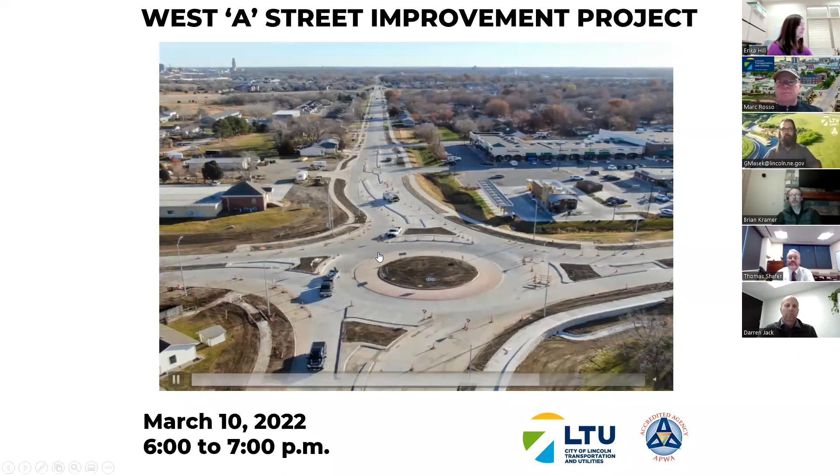Okay, so on the agenda this evening, we will review progress that's been made since we last spoke with you all. We will be going through upcoming work and what you can expect through the spring and summer months. We'll break down Project A's next steps and go over the next steps for Project B. We'll continue to offer additional communication and identify a few ways to stay in touch in between these project updates if you have additional questions. And again, we'll open up the chat for everyone at the end of the presentation.

So I'd like to introduce Senior Construction Engineer Marc Rosso. Marc has more than 30 years of experience with the city and in the engineering field, 5 with the city. He is really a wealth of knowledge when it comes to construction planning and project delivery. He is joining us to talk about the West A Improvement Project and progress made on Project A specifically.

All right, thank you, Erika. So we're getting going, probably next week we're doing tree removal right now, and then we're going to work on the rest of the project from west of the Coddington intersection there. For those of you joining us the first time, here's a map that shows the entire project from Southwest 5th to Southwest 36th. It's one of the larger projects that we do in Lincoln.

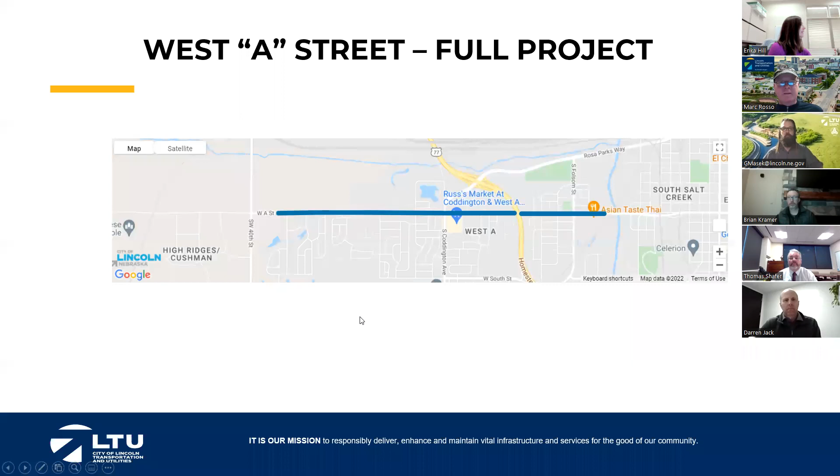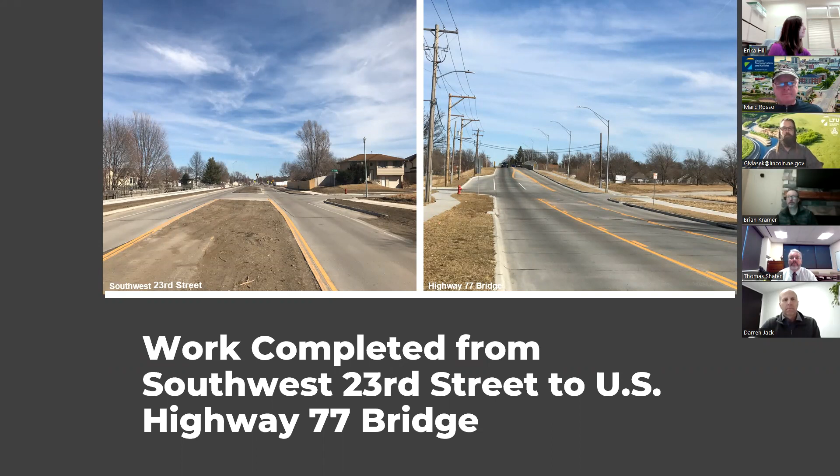So this is, next slide please Erika. Is it going? We're getting there. All right, there it is. So this is the project I'm talking about. Most of us have seen the whole thing, so I'm not going to go into great detail about it. Next slide. This is work completed from Southwest 23rd to US Highway 77, which of course was completed last year. Next slide, there we go.

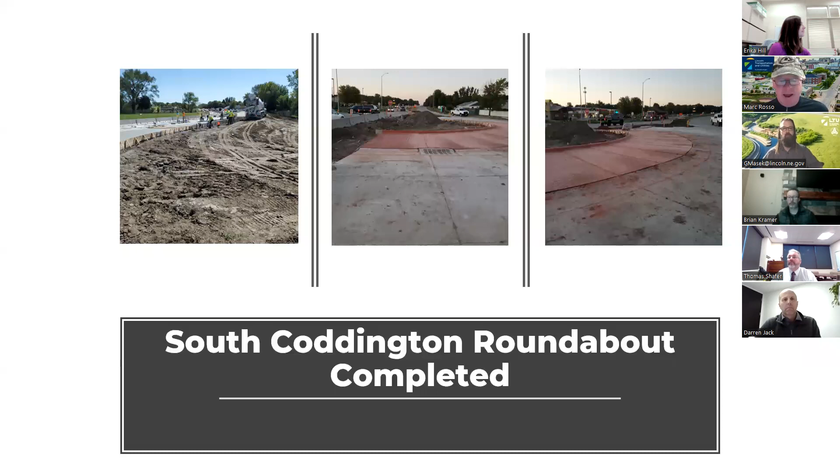This is the South Coddington Roundabout. We'll have a nice video of this later. It seems to be working pretty well, and I think people have adapted to it quite a bit. So we'll talk about step by step to complete Project A. Next slide. Roll the video. It worked, yay!

It's been open since November 29th of last year. Roundabouts, I think as many know, are used to improve safety, increase intersection capacity, and they're very efficient. They also reduce environmental impacts and enhance community values, and are quite a bit lower cost over a traditional intersection because we don't have to change signals out. Next slide.

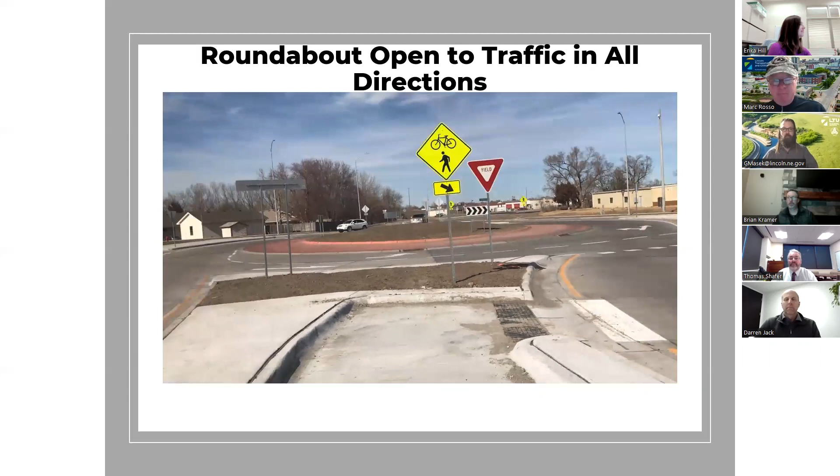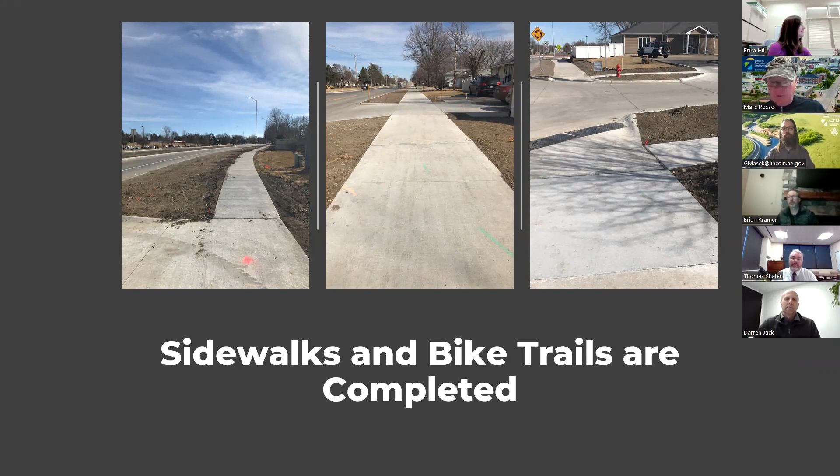Most of us have seen the new driveway connections, those turned out pretty well. Next slide. Sidewalks are all complete, I think the trail users in particular really like the wider trail. So that's completed all the way to the Highway 77 bridge. And when it's completed to Southwest 36th, it will be 9,100 feet of new trail. Next.

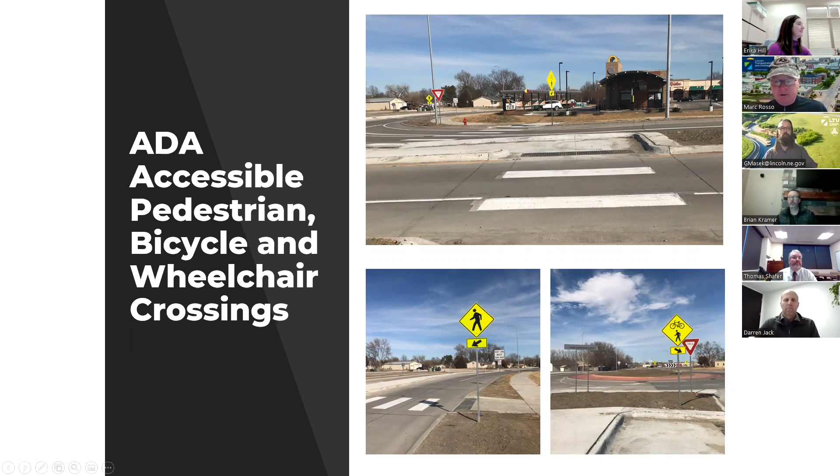We've got ADA accessible pathways and wheelchair crossings. This is especially good because it offers the ability to cross one direction of traffic at the roundabout, increasing safety.

Pavement markings are a challenge in Lincoln because our contractor seems to go away and not want to come back to do them, but they're all in place now.

Water, wastewater, and stormwater work is complete. If you recall, there was a deep cut, about 25 feet deep, for the sanitary sewer.

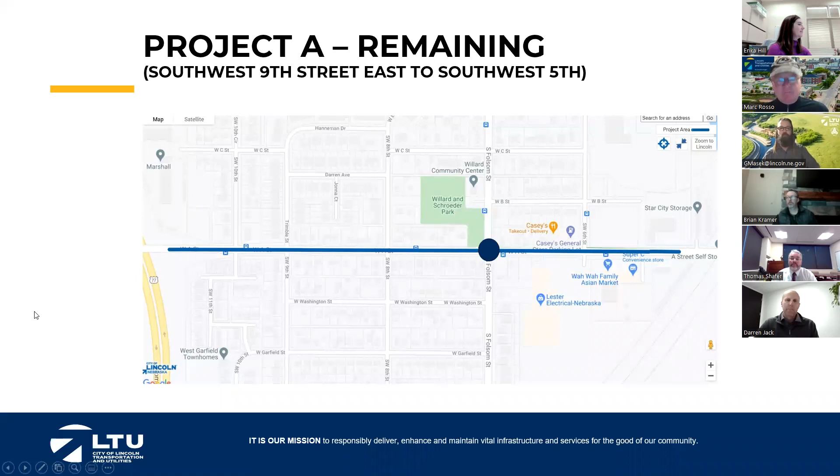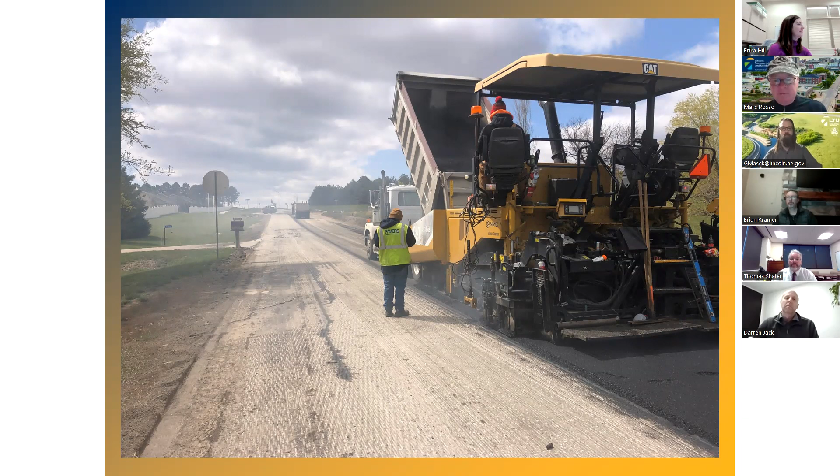I think most of us have seen this over the course of our lives. This is milling and overlaying, which basically scrapes off the surface and puts down a new asphalt surface, which usually results in extending the paving life.

We've got to finish seeding. Seeding improves erosion control, and once it's established, provides what we think is a nice looking product.

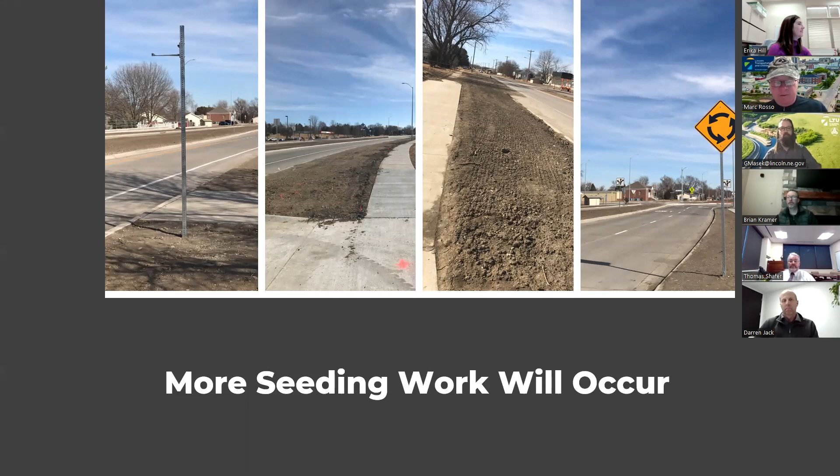We've been pretty busy over the past couple months. The design engineers have been working with homeowners to finalize our right-of-way agreements. We've been hiring contractors and coordinating relocations with utilities.

Back when we started street construction for Project A, you might remember we had LES relocating their power lines, crews installing wastewater pipe, and a few utilities that weren't even ready to get started. That was all going on while we were trying to reconstruct the street.

So for Project B, our plan is to complete much of that utility work before we even get started on the street construction. If you've driven along West A in the past week or so, you've seen that it's already getting started.

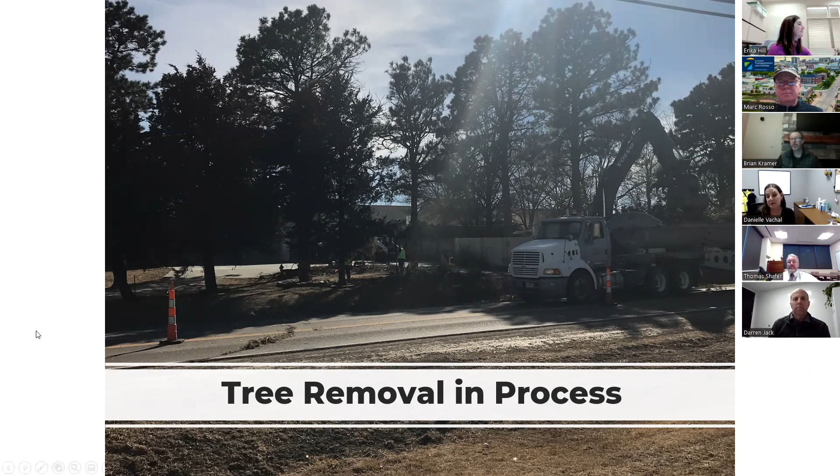You may have seen that some of these large trees have been cut down, but the tree trunks are still there, and you might wonder what's going on.

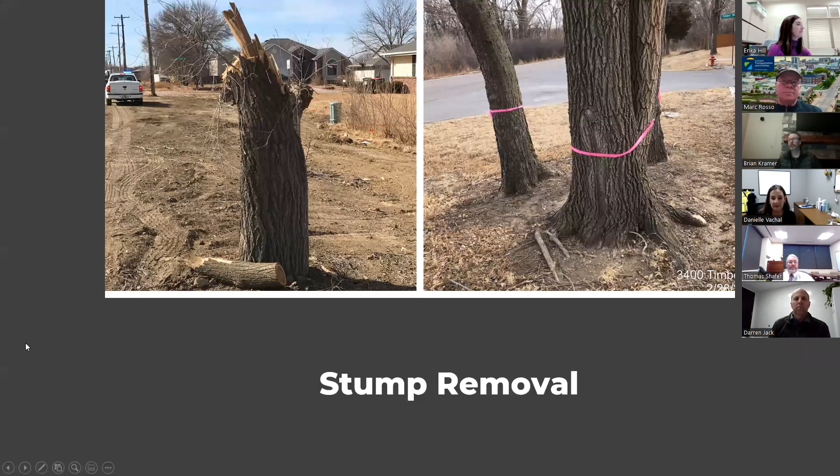What we have left are the stumps and large tree trunks. The contractor will come back after the April 1st deadline to make sure we get those tree trunks and stumps removed.

With that tree removal in progress, lane closures have been going on and will continue to be necessary for tree removal and other upcoming utility work.

For now, we are allowing the contractor short-term daytime lane closures. However, as work continues, you might see total closures over a few blocks at a time. These closures will be communicated through message boards and the neighborhood Facebook page. As always, please slow down through construction areas and keep an eye out for our crews.

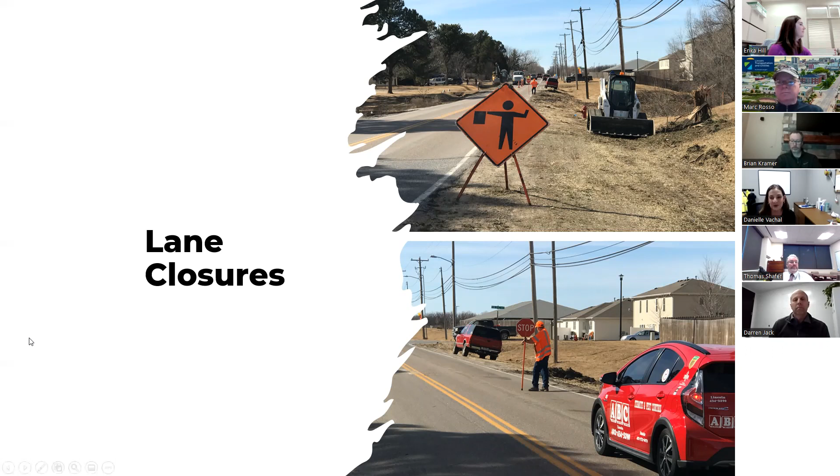Once we get the trees removed, LES will begin relocating their power lines from their power poles up in the air to underground. Starting next week, LES will begin staking their work areas and mobilizing equipment. Most of LES's work is on the north side of West A, off of the existing roadway. Those lower lines belong to Windstream and Spectrum, and since those cables are on LES poles, they will also be burying their cables so that the poles can be removed. LES is anticipating that their work will take 6 to 9 months.

So that was all on the north side. On the south side of West A, we have 2 utility projects. First, Black Hills Energy will be relocating a gas main between Southwest 23rd and Southwest 36th. This work will also occur outside of the existing street and is anticipated to take 6 to 8 weeks. The second utility project on the south side is a new wastewater line. Both projects are on the south side of the street and both plan to work from east to west. However, we're giving Black Hills Energy a 2 to 3 week head start so that they can be out of the way for the wastewater project. I'll tell you more about the wastewater project here in just a bit.

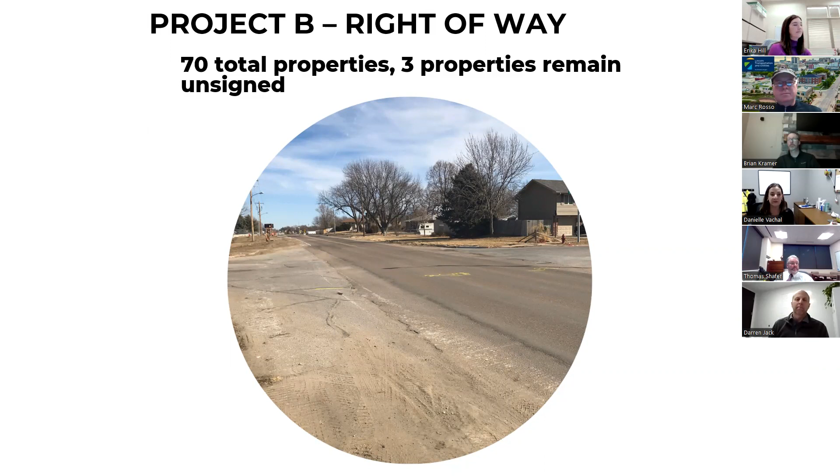The one more thing you'll be seeing happening out on West A is the removal of the house on the north side of the Southwest 36th Street intersection. Once this land is cleared and the street is constructed, the north leg of the roundabout could be used to connect to potential housing development in the area. Removal of this house will occur in April and should take less than a month to complete.

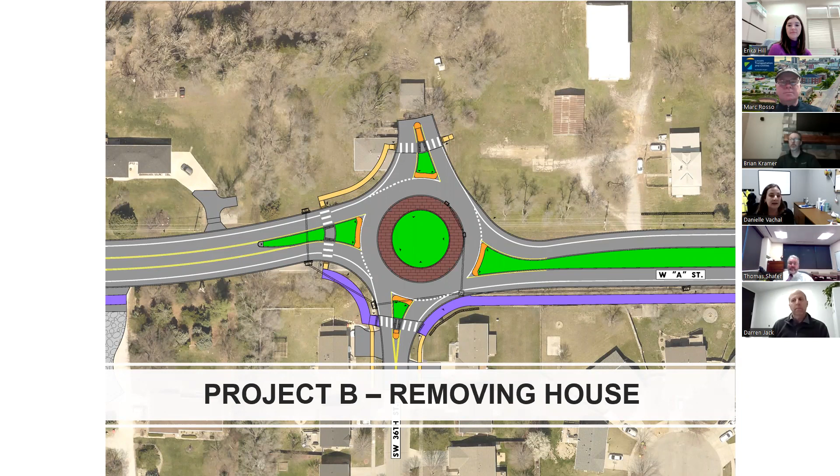Now for more information on the wastewater project I mentioned earlier, I'd like to introduce Brian Kramer. Brian is the superintendent of wastewater collection with the City of Lincoln, and has over 20 years of experience and dedication to the Lincoln community. Brian is here to talk about their plans to install the wastewater lines along Project B.

Hello, everybody. I've been a silent partner so far in these projects on West A because we've gone in with the paving projects, but on this project, we're going to be separated out and do the majority of our work this year, with the paving, I believe, taking place in '23.

Just to give you some context about wastewater before I start, there are 1,100 miles of sanitary sewer lines in Lincoln, and we have about 20,000 manholes across the city, and our pipes range from 8-inch to 96-inch in diameter. So it's quite an expansive system.

On this project, we are installing sewer, replacing some sewer and installing some new sewer, right where the paving is going to happen, starting from Southwest 23rd. Then we'll work our way west towards Southwest 36th. We're installing about 6,500 feet of sanitary sewer pipe.

Previous to this phase 3, we did our phase 1 and 2, and that was done with the paving that occurred east of here. Primarily what we're installing is 18-inch, and there's some 21-inch sewer, 10-inch, and 15-inch. It's a lot of various sizes on this project.

Starting on the east side at 23rd, we're replacing the sewer that's there today. It is undersized, and when it was built, it was vitrified clay pipe, and that clay pipe is starting to break apart and is becoming unreliable. So we're installing that with a new product. Could be PVC, might be HDPE. We'll have to see what's available and what our contractor wants to put in for material.

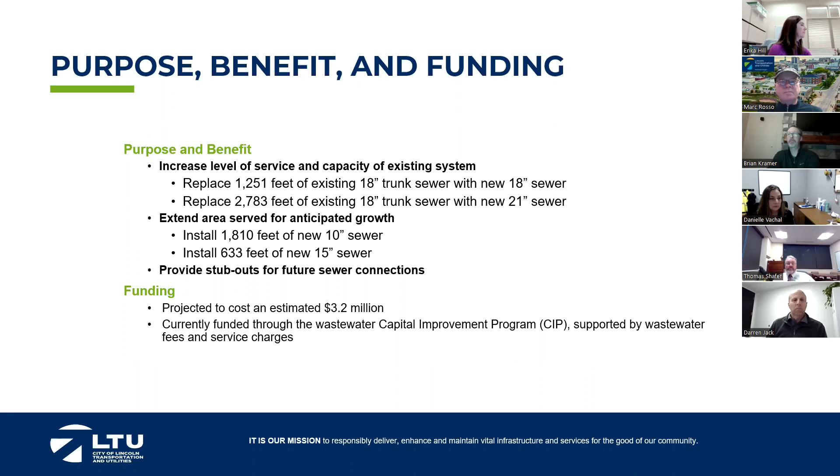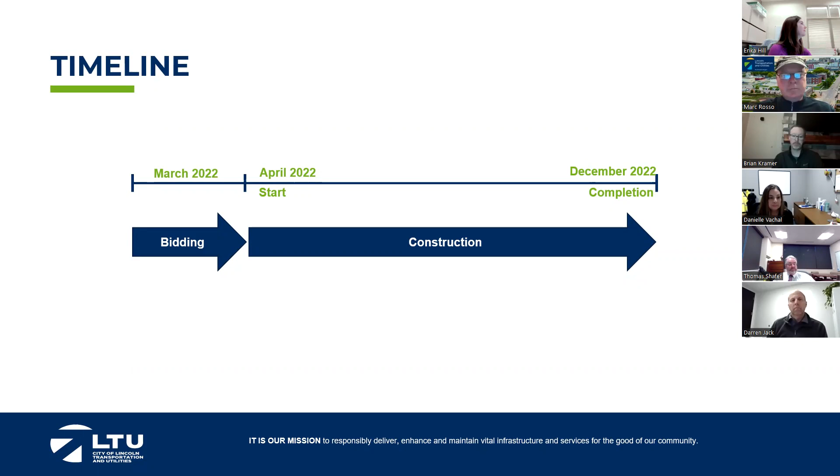We probably will start on the east side and move to the west. That's the logical way to put sanitary sewer in - you put it on the most downhill side first and work your way uphill as it lays underground.

Back to me, I think.

We know that this whole process has been taking a while, but we hope that you see the progress that we've made. Soon, this section of West A will have storm inlets, safer intersections, and paved sidewalks.

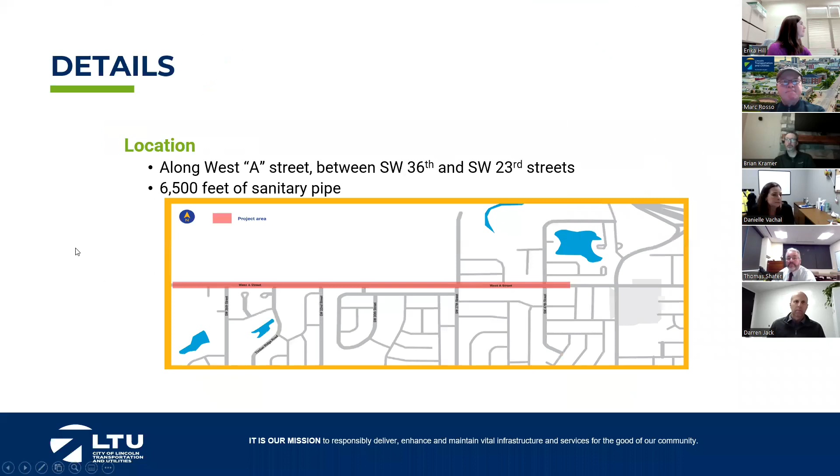Next question is, what does the project that is starting next week at Folsom and West A look like? Have you got a map of that, Danielle? Well, that was slide 8-ish, 11, something like that. Did it have the detailed roundabout, didn't it? Yep, let's see. Somewhere back here. Oh, keep going. No, it was part of Marc's slides. There it is. And then next one. I kind of get it, okay.

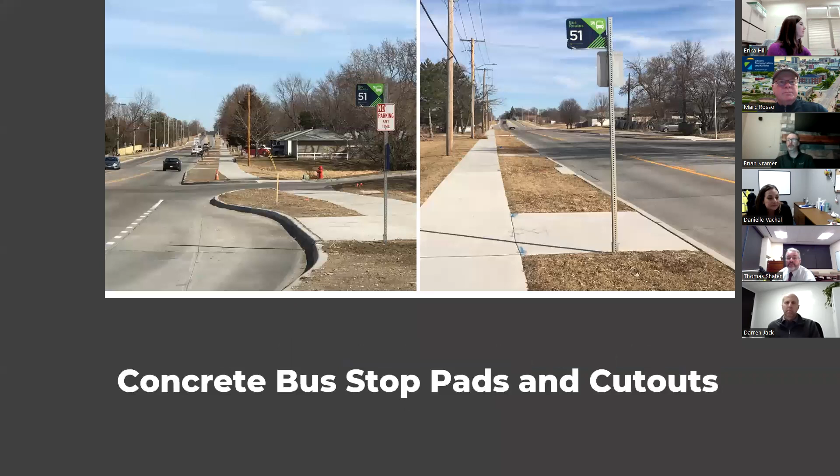So that project will basically change that four-way stop intersection to a smaller roundabout. I assume the question is, what will it look like? It says, what does the project starting next week at Folsom and A look like? They won't be tearing out the entire intersection. They're going to be cutting out sections from the pavement and reconstructing, modifying the intersection to make it a roundabout.

They won't be tearing it out completely down to the dirt, but they will be cutting out sections, putting in the raised roundabout medians and that center island, and doing some restriping. I think they are moving some of the outside corners out a little bit, and then they will mill and overlay with asphalt through that area. So it will change from this four-way stop to a smaller roundabout, and it'll be quite a bit different than the one at Coddington. That one has a grass median; this one is more of a raised median. Some of the trucks that need to go through this intersection would basically travel over that center area. So that's what it'll look like.